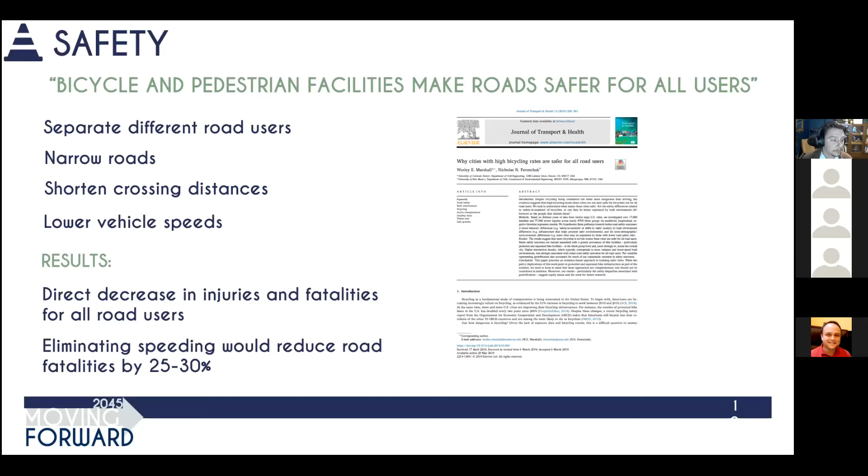Now, I think we can all picture a time where we were sitting in traffic wondering where it starts, why it's happening, and what did I do to deserve this? Simply put, in that moment, we are the very traffic we're complaining about.

I'm sure most of us have also been stuck in traffic and can remember a time a person on a bicycle gracefully zips on through the clogged roadway with ease, even when there aren't any bike lanes. Well, imagine if there was a bike lane on that road that you travel on so often that is always clogged up whenever you need to get from point A to point B. Now you've got a proper alternative to wasting precious time and money sitting in traffic.

Pedestrians and people riding bicycles take up far less space on the roadway than automobiles. Sidewalks and bikeways can move many more people in far less space than auto lanes can. Another byproduct of getting more folks walking and biking is the need for less parking in our communities. Less cars means less parking requirements.

When walking and biking are paired with appropriate public transit, it can significantly reduce the most routine and mundane instances of congestion that we experience. But congestion isn't merely an inconvenience. It's detrimental to our financial well-being, quality of life, and it's a significant negative impact on air quality. After all, more time spent idling in traffic means more time that your engine is running, more fossil fuels that are burning, and your car is blowing it all out of its tailpipe and into the air that we breathe.

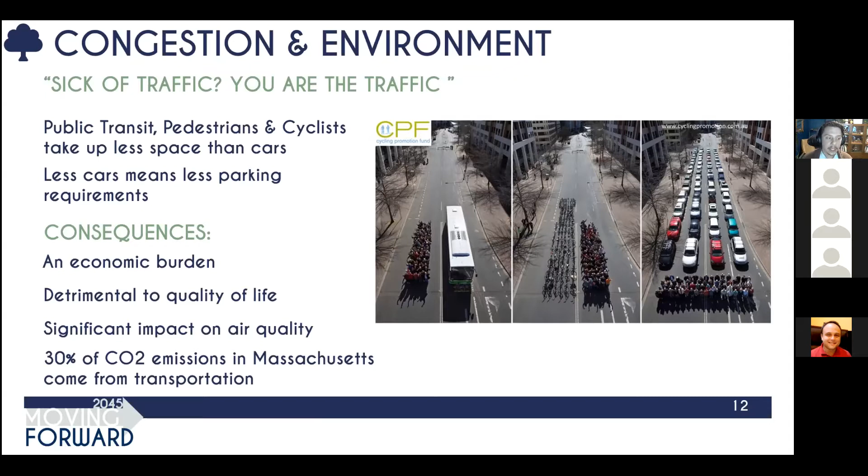The public health effects of a car-dependent society are diverse and well documented. Deaths and injury due to car crashes, depression and anxiety from long and isolated commutes and severed communities, higher rates of obesity and cardiovascular disease from physical inactivity, lung cancers and pediatric asthma from pollution, sleep disturbance, hypertension, and raised blood pressure in children from noise at road intersections. The list goes on. These are all public health risks of excessive automobile use and dependence.

Recent advancements in autonomous tech and the electrification of automobiles will help to curb some of those public health and congestion issues in our region, but their costs can be prohibitive. The easier, low-cost intervention for all of these public health maladies is bicycle and pedestrian infrastructure. By getting more cars off of the road and further separating them from other modes of transport, we decrease the likelihood of crashes with and between automobiles.

We decrease the amount of time spent inactive throughout our already quite inactive lifestyles. And we decrease the amount of pollution emitted from tailpipes, thus lowering rates of pulmonary diseases while lowering transportation's contribution to overall greenhouse gas emissions. And on the other side of the coin, by getting more people on bicycles and walking through their communities, we increase levels of physical activity, of which the positive side effects are boundless. Better sleep, better heart health, better mental health, lower rates of obesity, and so on.

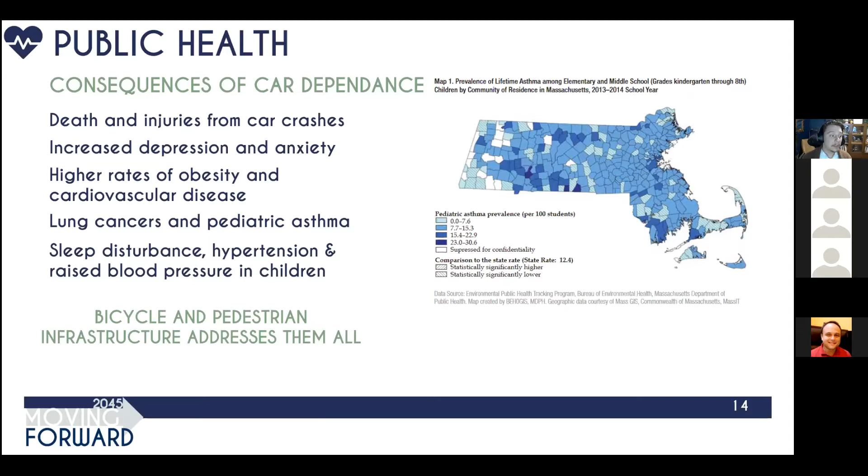Now, all forms of transportation interact with and influence the economy at all levels, local, regional, state, and nationally. Automobiles and other forms of motorized transport have a good number of costs that come hand in hand with the conveniences they offer. Injury, death, pollution, lost time, lost productivity, and physical inactivity caused by our use of automobiles all impact our economy greatly. That cost to the public is approximately $35.7 billion annually.

Those are the costs that Massachusetts residents incur, whether or not they even drive. Those residents that don't drive or don't have access to a vehicle are predominantly lower income and benefit far less from the vehicle economy. Another $28.4 billion annually is paid out by consumers to own and operate their private vehicles. Those of us who own and drive cars know all too well the variety of costs that our vehicles incur on us throughout the year.

Now let's take a closer look at the economic benefits of active transportation, some of which I've already highlighted on my previous slides. Biking and walking increase our transportation system's overall efficiency by reducing some of the negative effects of auto travel like congestion, the need for on-street parking and parking garages, and accident damages.

When combined with public transit access, walking and biking facilities improve access to education and employment opportunities, especially for those of us who do not or cannot drive. A healthy workforce is a productive workforce. There is a direct link between increased labor productivity and increased worker fitness.

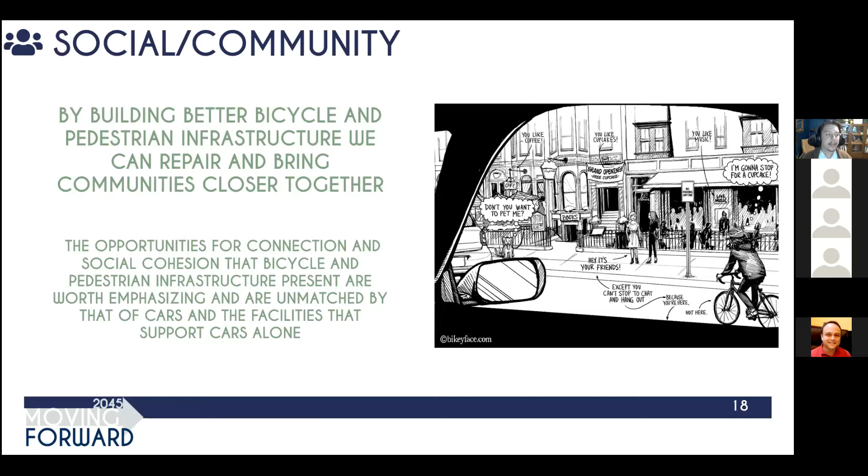The efficiency or effectiveness of our transportation system should not be measured in terms of level of service, but by how well it serves its most disadvantaged and underserved community members. It must be the goal of transportation practitioners and community leaders to provide access to affordable and reliable transportation to fairly meet the needs of all community members, but particularly traditionally underserved populations.

The reality of our transportation system is that the people who most need alternatives to the automobile are less likely to live near or travel along roads with safe, accessible, high quality bicycle and pedestrian infrastructure. That means the most underserved or at-risk people in our communities are the ones walking or riding bicycles along roadways with higher traffic speeds, volumes, and pollution. When you don't have anywhere safe to walk or ride that is properly separated from traffic, you are at much higher risk of being struck and killed by an automobile.

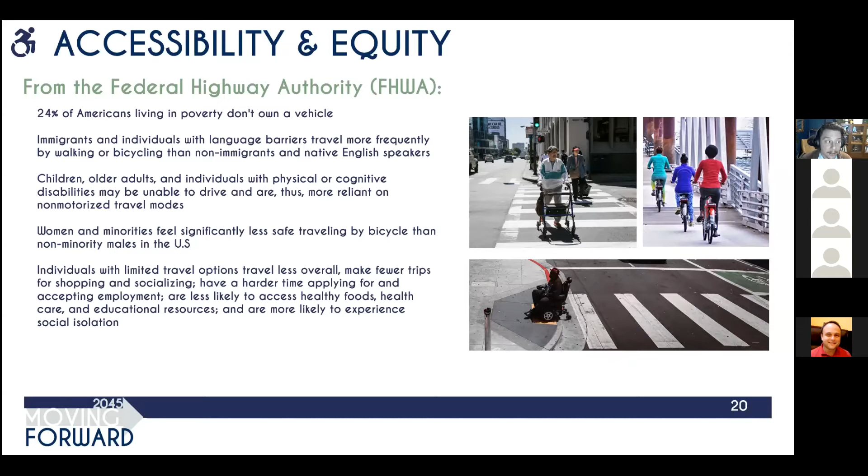A street that does not allow for safe and accessible transportation for all users is failing and incomplete. And that begs the question: what is a complete street? There's a whole movement in transportation planning and community advocacy around the idea of complete streets. It brings together policy and people, networks and neighborhoods, designs and destinations. The complete streets concept reclaims streets for people, re-examines the public realm, and challenges some commonly held perceptions about transportation.

A complete street is a street that is safe and accessible for all users: pedestrians, bicycles, transit users, and motor vehicles. Complete streets accommodate people of all ages and physical abilities. There is no single formula or prescription for the complete street. It is complete because it speaks to the context of the surrounding area—it's a statement of that place. Complete streets is far more than just a concept.

Federal and state DOTs have taken notice and have acted to provide funding for communities to take on complete streets projects. Cities and towns within Massachusetts can participate in the Massachusetts DOT Complete Streets Funding Program to make complete streets part of daily practice in their communities. Our agency assists municipalities within Southeastern Massachusetts with the development and adoption of complete streets policies that direct all town departments to consider complete streets design elements in all projects and phases going forward.

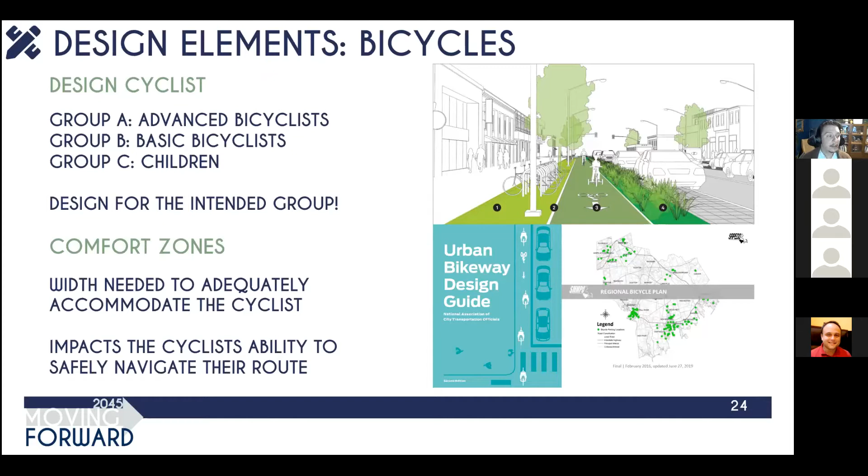Before discussing bicycle and pedestrian infrastructure, it's important to understand the characteristics and comfort level of cyclists. A key concept in the development of bicycle facilities is the design cyclist. Similar to a design vehicle, the concept of the design cyclist allows bicycle facilities to be planned for users of varying degrees of skill and cycling ability. Three groups have been defined and used in bicycle planning when discussing design cyclists. Another important consideration for bicycle safety is the comfort zone—the width needed to adequately accommodate cyclists, plus the width to operate and maneuver a bicycle. Now let's get into those bicycle facilities.

Sharrows are road markings used to tell street users that the lane is for both cars and bicycles. These markings are not a substitute for bike lanes—they do not provide any additional safety to anyone riding their bicycle on that road. However, the primary benefit of these markings is to reinforce the legitimacy of bicycle traffic on the street. These markings should only be used on roads that are too narrow to include a true bicycle lane.

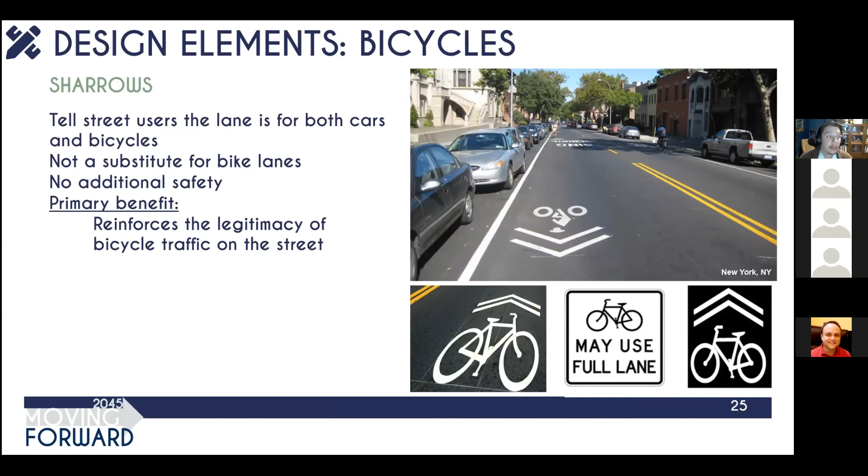Bike lanes are defined as a portion of the roadway designated by striping, signage, and pavement markings to be primarily or exclusively used by bicyclists. Bike lanes enable bicyclists to ride at their preferred speed without worrying about traffic conditions, and facilitate predictable behavior and movements between bicyclists and motorists. A bike lane differs from a cycle track in that it has no physical barrier blocking it from automobiles. Bike lanes usually go with traffic, although they can be designed to go against traffic or in both directions on the same side of the road when necessary for connectivity of a particular bicycle route.

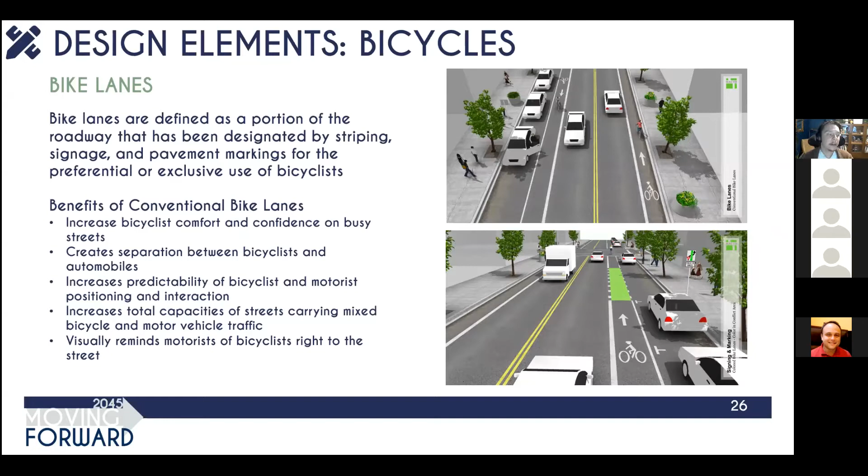Buffered bike lanes are conventional bike lanes that have a buffer separating the bicycle lane from the adjacent motor vehicle travel lane or parking lane. Buffered bike lanes provide greater distance between motor vehicles and bicyclists, allowing them to pass each other more safely than non-buffered bike lanes.

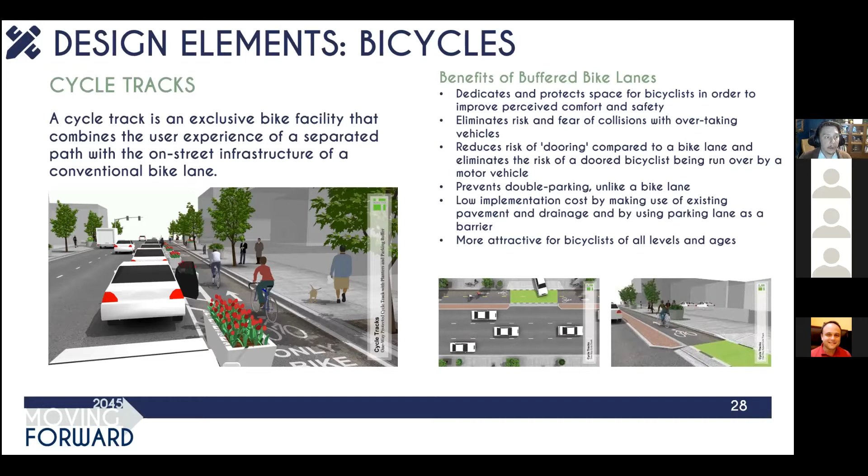A cycle track is an exclusive bike facility that combines the user experience of a separated path with the on-street infrastructure of a conventional bike lane. A cycle track is physically separated from motor traffic and distinct from the sidewalk. Cycle tracks have different forms, but all share common elements: they provide space intended to be exclusively or primarily used for bicycles, and are separated from motor vehicle travel lanes, parking lanes, and sidewalks. Cycle tracks are more attractive for bicyclists of all levels and ages.

Bicycle boulevards are streets with low motorized traffic volumes and speeds, designated and designed to give bicycle travel priority. Bicycle boulevards use signs, pavement markings, and speed and volume management measures to discourage through trips by motor vehicles and create safe, convenient bicycle crossings of busy arterial streets.

Bikeway signing and marking encompasses any treatment or piece of infrastructure whose primary purpose is either to indicate the presence of a bicycle facility or to distinguish the facility for bicyclists, motorists, and pedestrians. Some bicycle-specific signage exists to provide motorized traffic with information and instruction.

Bikeway markings represent any device applied onto the pavement surface and intended to designate a specific right-of-way direction, potential conflict area, or route option. Bicycle signals and beacons facilitate bicyclist crossings of roadways. Bicycle signals make crossing intersections safer for bicyclists by clarifying when to enter an intersection and by restricting conflicting vehicle movements.

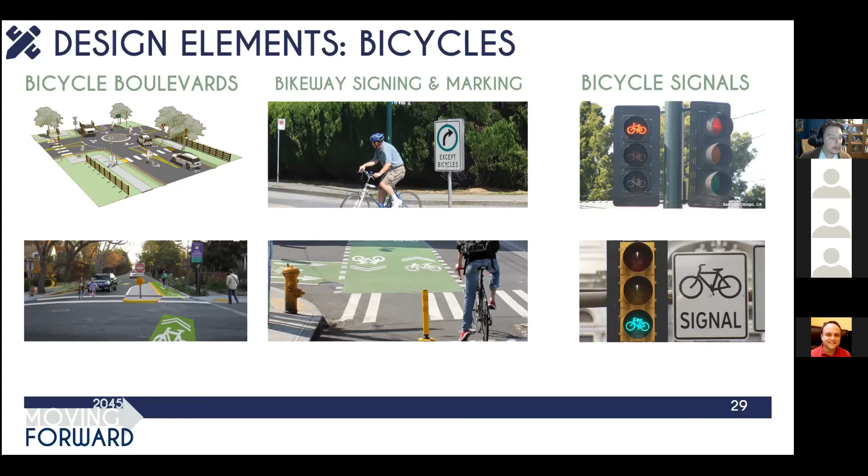The definition of a sidewalk is a paved path for pedestrians at the side of the road. While this definition is technically accurate, it does not capture the full essence of the entity. A sidewalk's main purpose is to provide safe travel for a pedestrian, but it also can be a social space or an attraction for business.

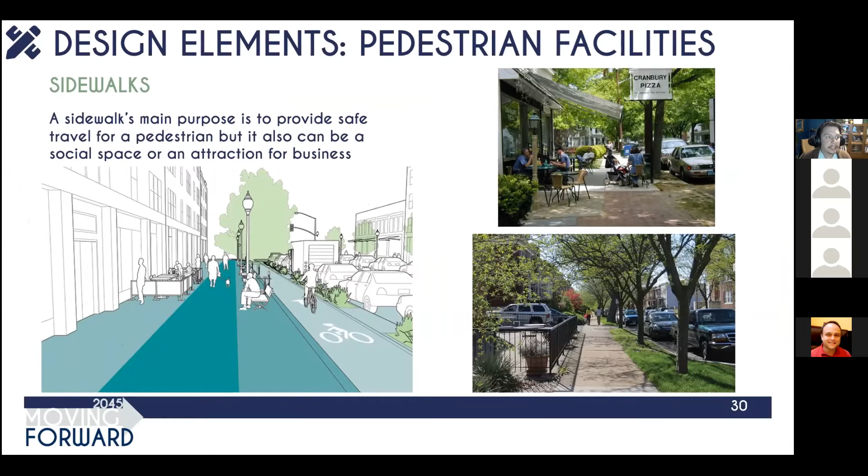For example, a sidewalk with enough room to accommodate seating for a street-side cafe. When designing or improving a sidewalk, it's important not only to take into account the safety of pedestrians, the nature of the roadway area, but potential for economic development should also be considered.

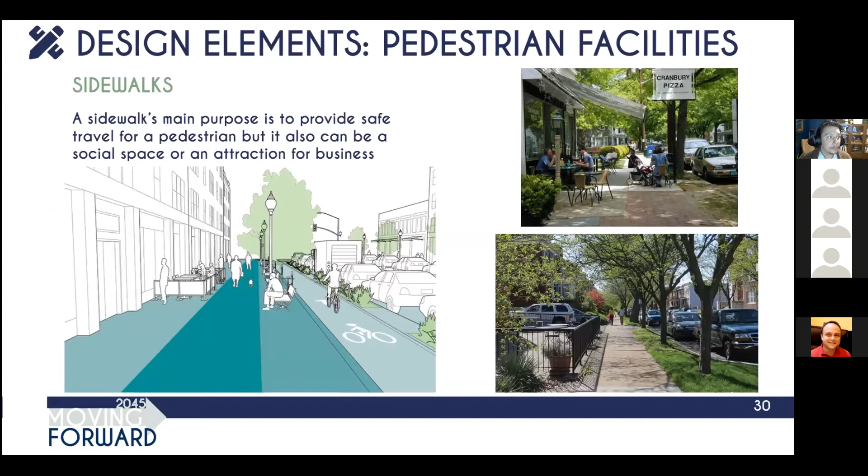Crosswalks should be designed to offer as much comfort and protection to pedestrians as possible. Historically, many crosswalks were designed using inadequate narrow striping, setbacks, deviations from the pedestrian walkway, and considerable crossing distances. Crosswalks are defined as specially paved or marked paths for pedestrians crossing a street and typically fall into two categories: intersection crosswalks and mid-block crosswalks.

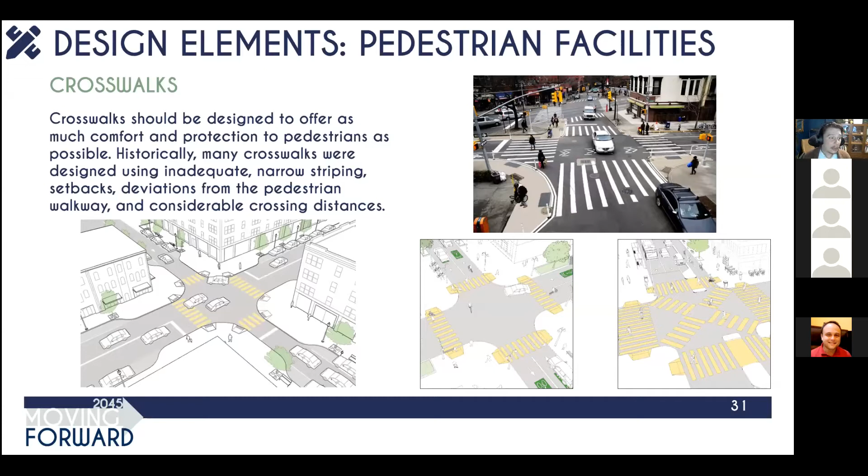While intersection crossings are typically preferred, there are some situations where a mid-block crossing is necessary. For example, places where there is a long distance between intersections or there are a high volume of pedestrians crossing that road.

Speed tables are mid-block traffic calming devices that raise the entire wheelbase of a vehicle to reduce its traffic speed. Where applied, speed tables may be designed as raised mid-block crossings, often in conjunction with curb extensions.

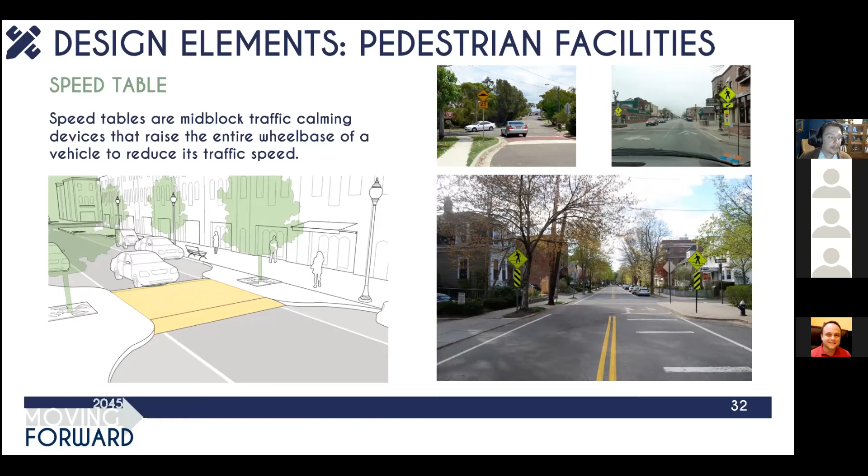Curb ramps are solid ramps providing transition between the sidewalk and street level and can either face the direction of travel through the crosswalk or be placed at an angle to provide access to two perpendicular crosswalks. Curb ramps should always meet Americans with Disabilities Act design guidance and should have a tactile warning panel. Tactile warning panels are rectangular panels with raised bumps that alert pedestrians with low vision or blindness to the presence and direction of a roadway crossing.

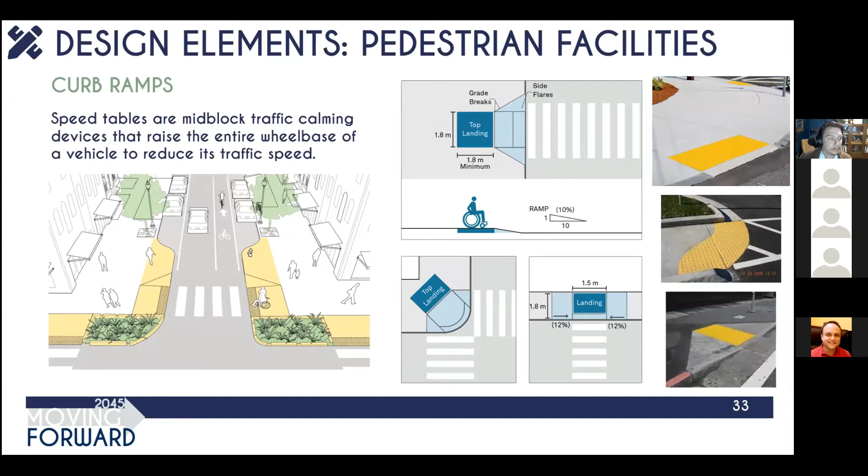Curb extensions, also called bump outs or bulb outs, are a physical extension of the sidewalk into the roadway to narrow the roadway and provide additional pedestrian space at key locations. Curb extensions enhance pedestrian safety by increasing pedestrian visibility, shortening crossing distances, slowing turning vehicles by tightening the turn radius, and visually narrowing the roadway. Generally, the further the bulb out extends into the roadway and the tighter the turn radius created by the bulb out, the greater the benefits.

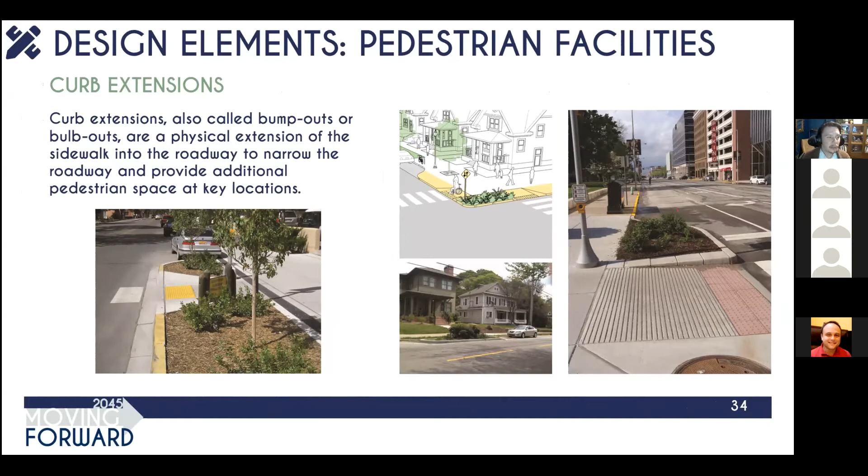Median refuge islands, sometimes referred to as pedestrian safety areas, are a raised or marked area between two opposing directions of travel that allow pedestrians to cross one direction of traffic at a time. This significantly reduces the complexity of the crossing. Providing raised medians or pedestrian refuge areas at pedestrian crossings at marked crosswalks has demonstrated a 46% reduction in pedestrian crashes.

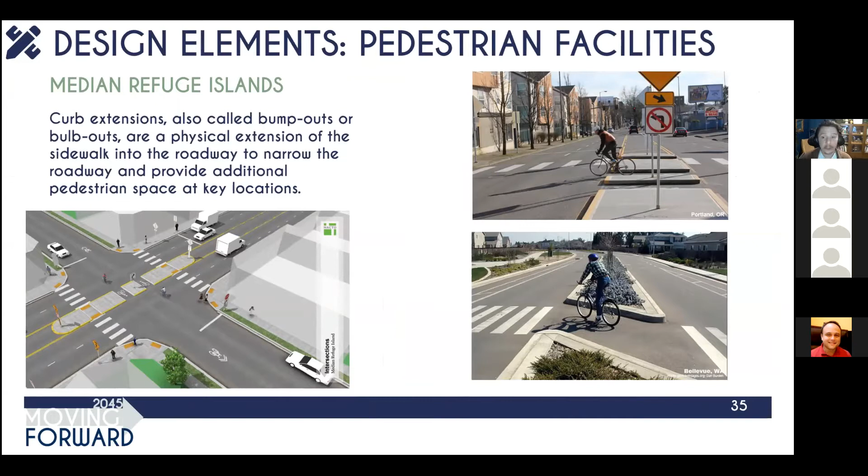Equally important to the allocation of space in the form of street cross sections and geometry is the allocation of time performed by traffic signals. Space and time in combination govern how streets operate and how well they provide mobility, safety, and public space. Signal timing is an essential tool, not just for the movement of traffic, but also for a safer environment that supports walking, bicycling, public transportation, and economic vitality.

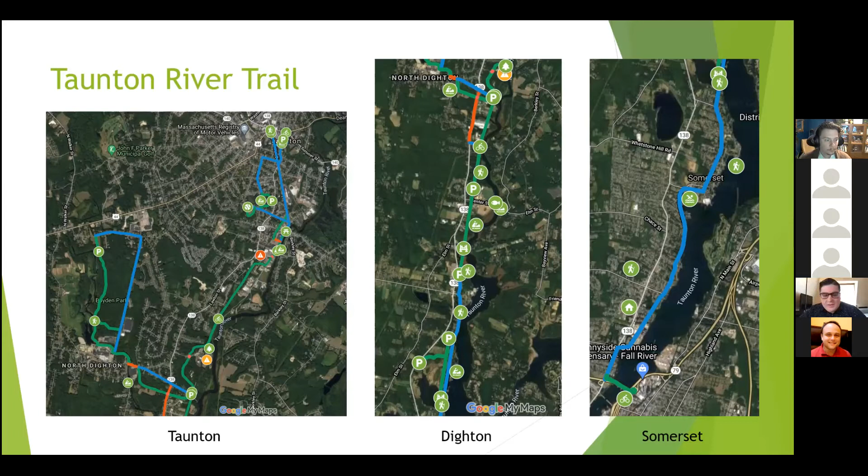So this is Taunton's portion of the Taunton River Trail. What we are working on right now, I like to refer to as the skeleton, because as you saw in the previous slide, there are a lot of different connections we would like to make. But right now we are focusing on this 2-mile portion from the Weir Village Riverfront Park at the top of that photo down to Railroad Ave, to get us as close to Dighton as possible.

Beginning in 2018, the Taunton Pathways Committee began engaging with the Gateway City Parks Program, which is a program of the Executive Office of Energy and Environmental Affairs at the state level. They provide funding for parks and other recreational amenities to the Commonwealth's 26 gateway cities. It's important to note, as Greg also pointed out about equity, that this program was created with the intention to promote equity in transportation and recreation in our gateway cities, which are traditionally disinvested in. A lot of small towns and wealthier communities have the discretionary funds available to do these improvements and create this infrastructure, but a lot of our gateway cities don't. So we've been working with them since 2018 on this 2-mile section of the trail.

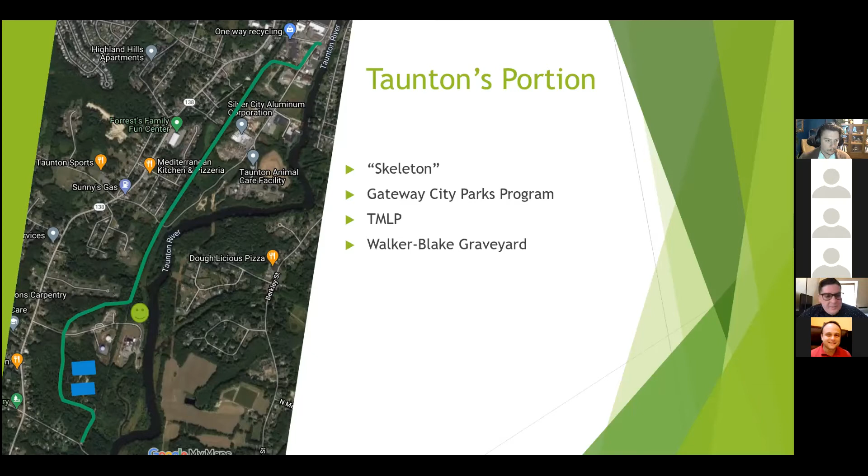As I said, the trail begins at the Weir Village Riverfront Park. Some of you may have been there and seen it. This was the former FB Rogers site in the Weir. The Weir, if you don't know, is a very industrial area of the city of Taunton that had, and still has, a lot of blighted old factories. FB Rogers was an old factory that was torn down and turned into this linear park, at a cost of 3.7 million. It was a local, state, federal partnership, which I pointed out is important. There was local money invested, state money in the form of 2 park grants, money from DEP and Mass Development, as well as federal money from HUD and EPA. This was really the beginning of the revitalization of the Weir section of the city.

This park serves as the trailhead for the Taunton River Trail. So when we start construction of the trail, it will connect to this park. And then, just to the point of economic development, the top right 2 photos are of the River House restaurant, which just opened last year, I think during the pandemic. That building was vacant for so many years, but once the city took action to clean up this area and build this park, it directly resulted in this property owner and business owner finally making use of that property and creating this restaurant. I'd encourage you to check it out. One thing I like to tell people is when this section of the trail is complete, you'll be able to get dinner at the River House, ride your bike, work off the dinner to Frates, have some ice cream, and then ride back and work off the ice cream.

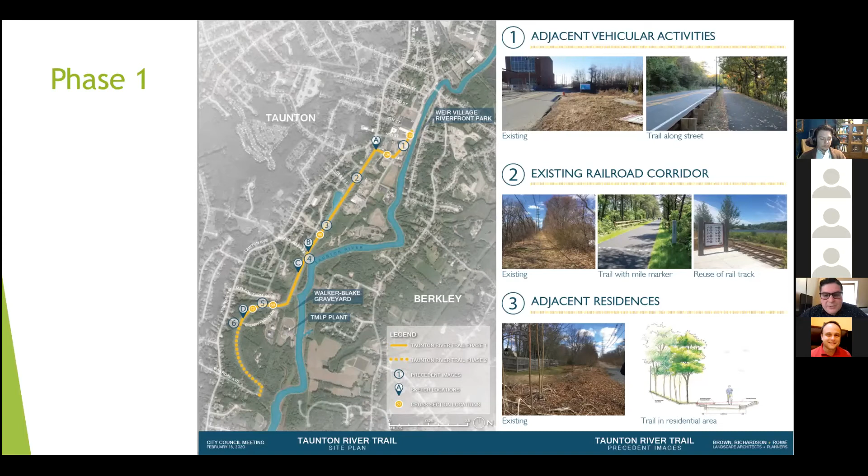Then we have the conditions on the railroad corridor. That's pretty straightforward - like they did in Fall River with the Quequechan, we're going to try to restore and reuse some of the rail for historical exhibits. There are some areas with adjacent residences that we're working with those neighbors to accommodate.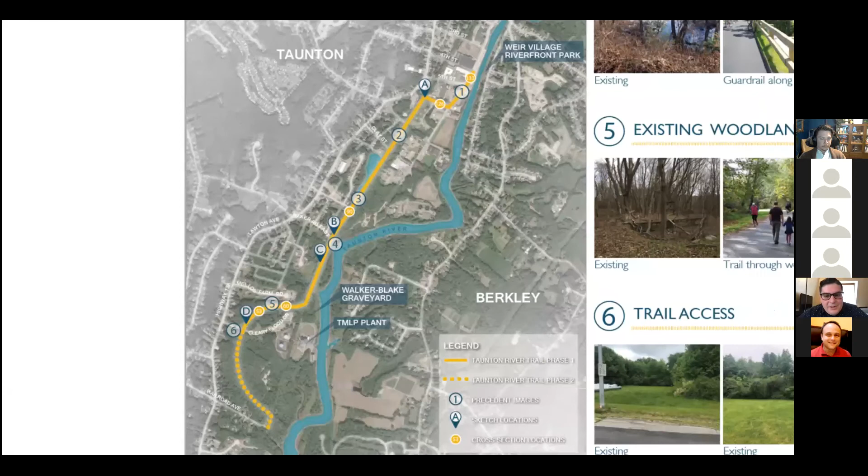There's a nice point in the trail along the railroad bed, at number 4, where it's right up against the river, so we're going to have a nice seating area overlooking the river there. Then, as I said, it will turn off of the railroad bed to go around the TMLP, and for phase 1 it will stop at the TMLP's access road, Cleary Flood Drive.

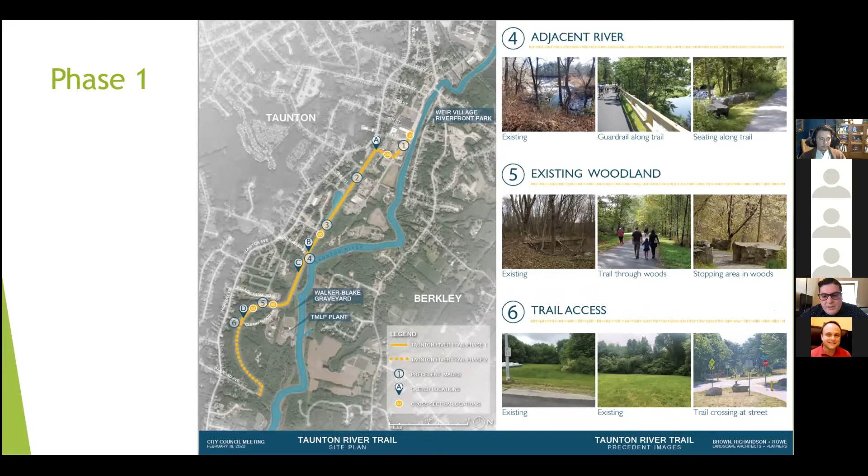This is just a depiction of some of the landscaped and furnished areas on the trail. We have a few different seating areas: one where the trail turns onto the railroad bed, one at the location right up against the river, and then the trail entry at Cleary Flood Drive.

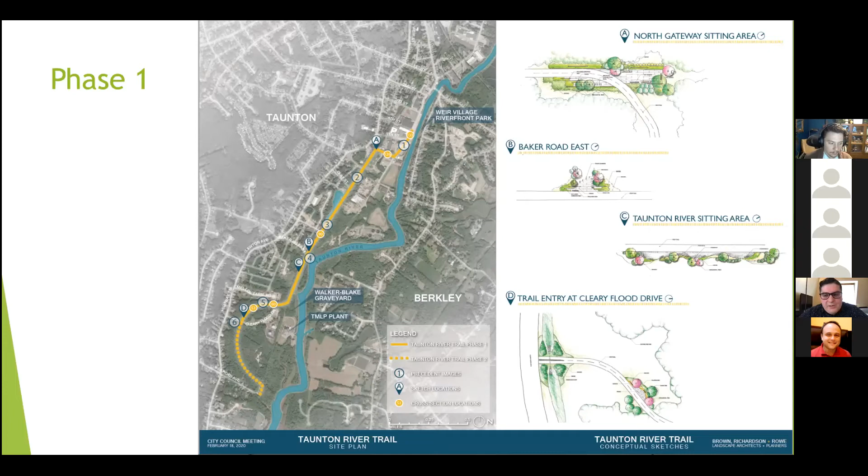These are just the typical cross sections for the different sections of the trail - the on-street section, then on the railroad corridor, and through the woods.

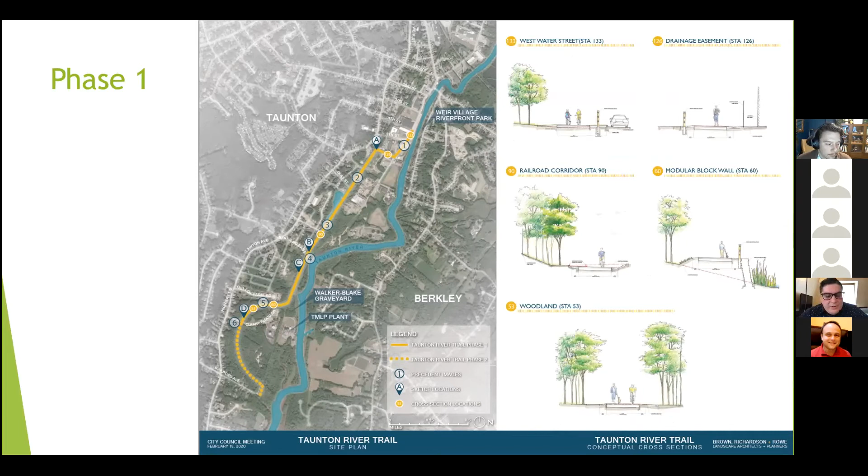This last slide on this section is just about the wayfinding and signage we'll use on the trail. These photos are from different trails that the Gateway City Parks program has done. I think the most notable in this region is the Quequechan, so it will look very similar to what you see on that trail - there will be directional signs, mile markers, and different signs pointing out historical, natural, and cultural amenities.

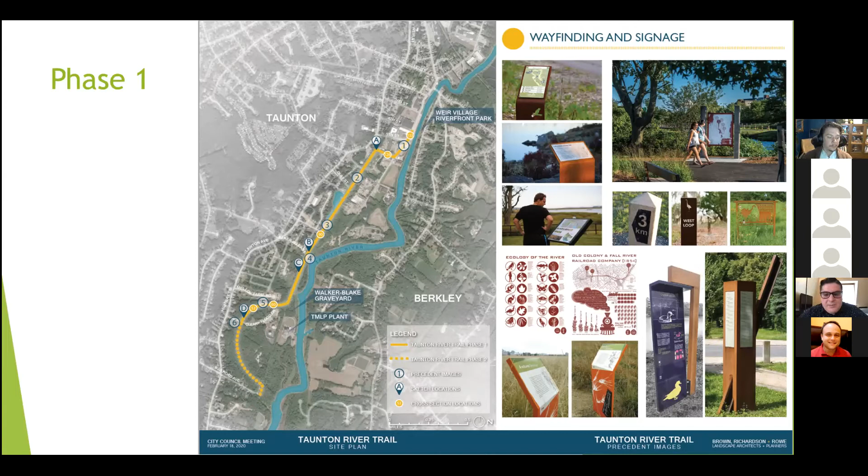Phase 2 is just the section that continues from the TMLP's access road and loops around back to the railroad bed to get us to Railroad Ave. Those two blue squares are where the TMLP has proposed to build a solar array, and that's why we're working on this in partnership with them - to try to get that solar array built with the trail and do it in one fell swoop.

I just wanted to point out some of the other recreational work going on in the city that includes pathways. Right now, Memorial Park is under construction for what they're calling phase 1 of the work to be done at that park, which includes resurfacing the pathway at the front of the park.

Our Office of Economic and Community Development, under the leadership of Bill Roth, who is also on the webinar - thank you, Bill - is looking at addressing Walker Park, on the other side of the River House restaurant. That park would connect basically the two sides of the river and make a nice loop, because there is a park on each side of the river.

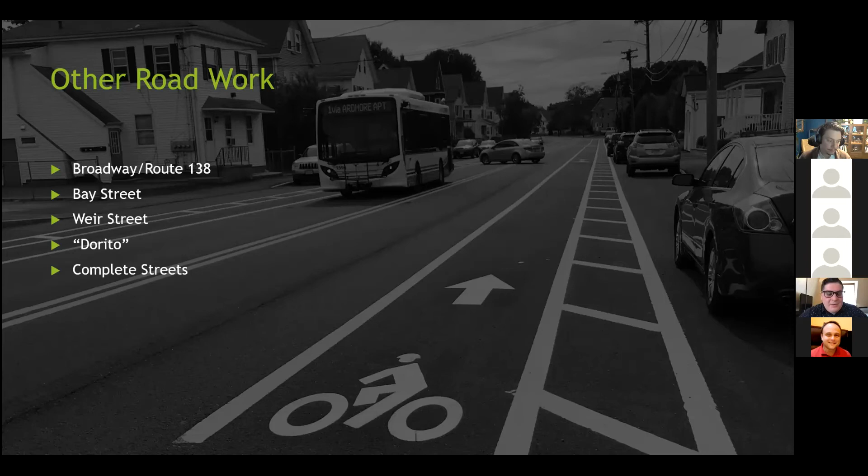So that's something that I hope, as chair of this committee and as a city councilor, we can work with our DPW on going forward. Next slide.

And then our future plans. So phase 2 is the obvious one, to finish off that 2-mile section of the Taunton River Trail.

The long-term plan is to connect to Dighton on the railroad bed. There are several obstacles to that, so it may have to be an on-road connection with the help of our friends at Mass DOT for right now, but eventually we do want to connect on the railroad bed going over the 3 Mile River. And then there is also a railroad spur off of that section that connects to Boyden Wildlife Sanctuary.

Another gem in the city of Taunton that many, many people use, like Massasoit. So there's a good opportunity there to have an off-road trail to connect from this trail to the Boyden Wildlife Sanctuary. And then the last one I have listed here is the Mill River Park and Riverwalk extension.

This park was actually the last time the Gateway Cities Parks program funded a project in Taunton, about 10 years ago. It's a less known park behind our city hall that runs along the Mill River. One of our goals is to extend the Riverwalk behind our main street so that it helps improve the safety of the alleyways behind our main street and City Hall, as well as connect a lot of the significant sections of our downtown.

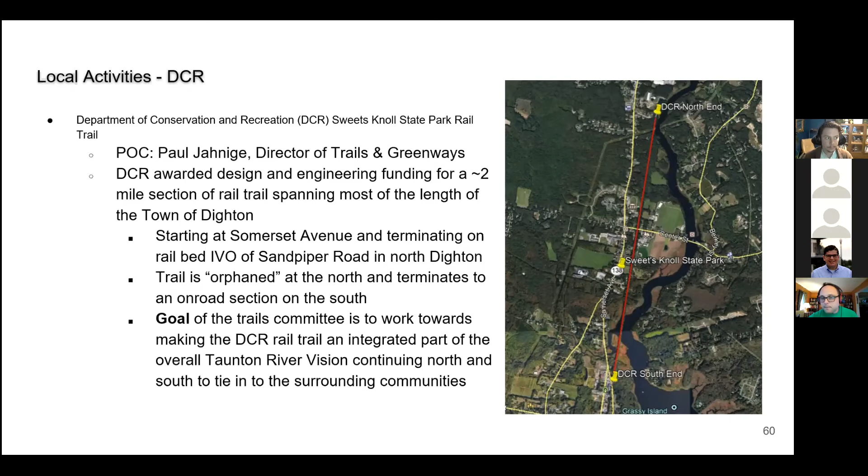Next slide. So on the south end, this is a closer look of what that looks like. That building there to the left houses a few different businesses. One of them is Alice's Last Stop, which is a restaurant. That's Somerset Ave behind there, and there's a trailhead.

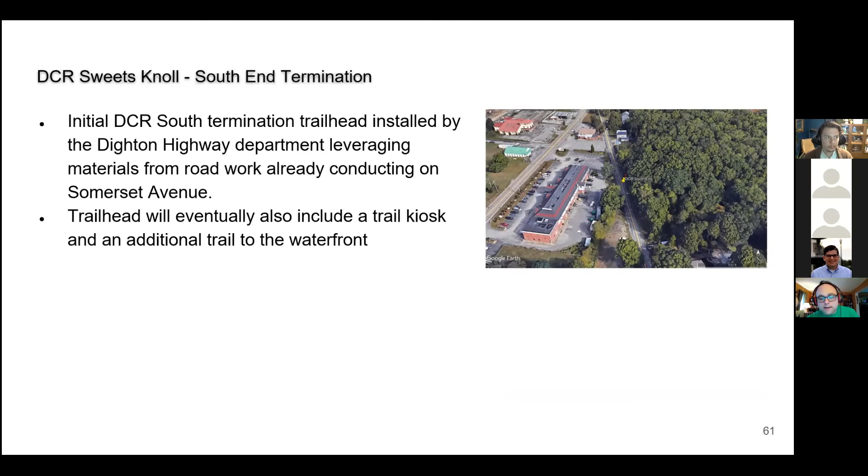If you hit next, this is what that looks like from the ground, and you'll notice that sign in the front there is the Taunton River Trail sign, one of the SRPEDD signs. It's right on there. Yeah, so you see it right there, and that parking area is right at that trailhead that comes out on Somerset Avenue.

So right now, that's just a parking area. Our highway superintendent and his department were doing some work on the road, and in the meantime, cleared an area and leveled that out for us. So right behind my car there is the trailhead. The intent is, we're going to put a trailhead marking there, a kiosk, and formalize that eventually.

Some of that is on Commonwealth property, so we have to work directly with the Commonwealth of Massachusetts to get permissions for crossing over their property, because we also want to add a trail there as well.

If you hit next, you'll see what we intend. So that push pin on the left, on that map on the bottom right, is that same trailhead. And so we're looking at a small trail leading through the woods that will eventually get you out to the waterfront.

One of the pictures earlier in the briefing was actually a panoramic view of being out there on the trail end. It's very, very pretty out there, nice to get out there. It's a low-lying area, so we have to work with the Conservation Commission on cutting in that trail, as well as settling on any trail treatments we want to make. But we want to put that in hopefully the next year or so, and be able to start that work.

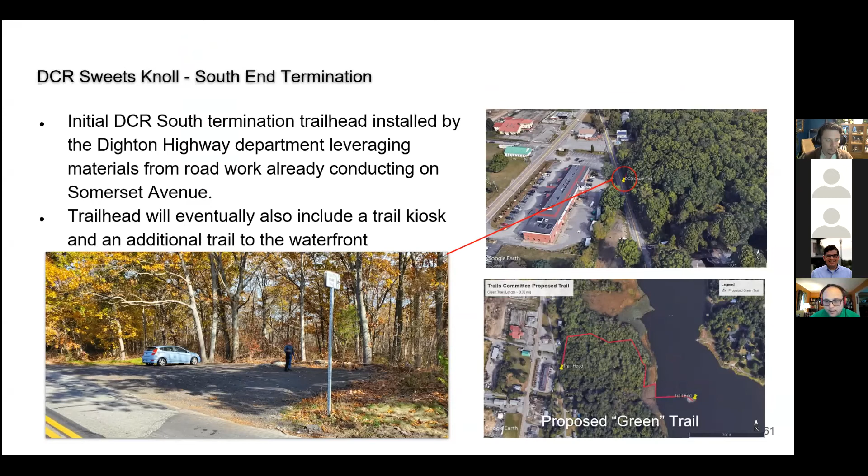Next, please. So over the Broad Cove Nature Trail, that's a panoramic view of the south end there. It's really a unique area. It's located in Broad Cove Marsh in Dighton. It's about a 25-acre plot, and there's two public entrances via car. One of them is to the west, right on 138. The other one is on Hart Street on the north.

So if you go there right now, there are some trails that are cut in. They're not formally marked, and we want to do that eventually, and also get a trail map on our trail kiosk, which I'll show a picture of here next.

But there's already observation platforms. There's 4 right now that we put in there, constructed and installed by the Conservation Commission. The Conservation Commission has been very busy here, and the folks have spent a lot of time beautifying this area and making it what it is today. And so we want to come along and alongside all those other groups and be able to just add some finishing touches to make this a formalized trail in the town of Dighton.

So if you hit next, I got a picture of, hit next again.

Yeah, so we have that kiosk there on the right. That's at the west entrance. And so we're working right now to finalize a draft for a trail map for that area. And then we want to also vet that by our Conservation Commission so that we can make sure we have

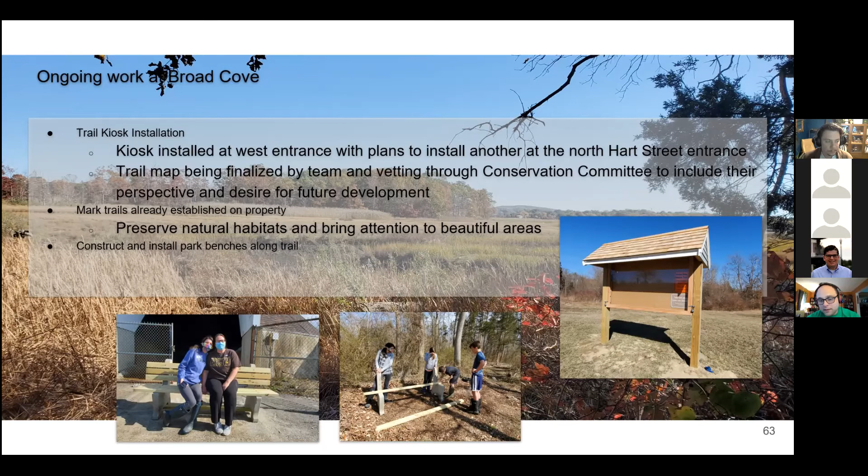Next, please. So going back to the DCR Sweet's Knoll Trail. DCR has got the design and engineering funding for their 2-mile section. I've mentioned this before in other groups, when I look at that 2-mile section, to me it currently looks like an island. It's this trail in the middle of town. There's no formal connections going north. It's effectively orphaned to the north. To the south, it comes out on an on-road section.

So to the south, we want to make on-road improvements, to make things complete-street style, to make it safe for pedestrians and safe for bikers. To the north, there's going to be a lot more work that needs to be done, with either coming up with an on-road solution or something that is able to get across the Three Mile River. There are different options, so everything's pointing towards pursuing a feasibility study.

So we did put in a request for funding for a feasibility study through our - the name escapes me right now, so I'll leave it alone - we are working towards putting together an article for the annual town meeting this coming June, to see if we can get funding from the town for a feasibility study.

Thank you. Yes, Gail, CPC funds. Thank you, so that chat is very handy.

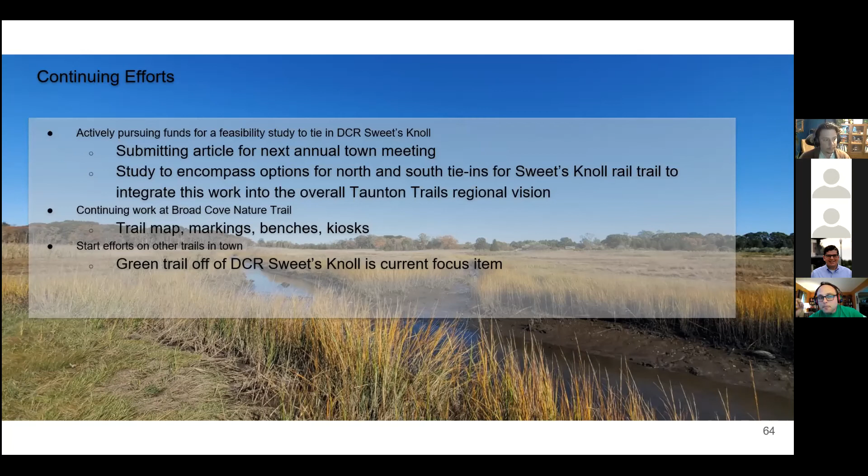Yeah, I will definitely put it in the chat. And that's it. With that, I can stick around for the Q&A.